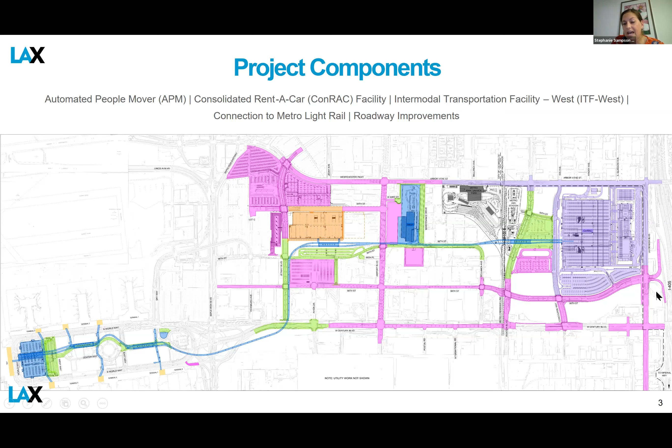So this is just a simplified map, and I mentioned we're going to walk you through all of the different components. We're going to start on the far west side, but you can just see from the previous elements map to this one, we're going to walk through right now.

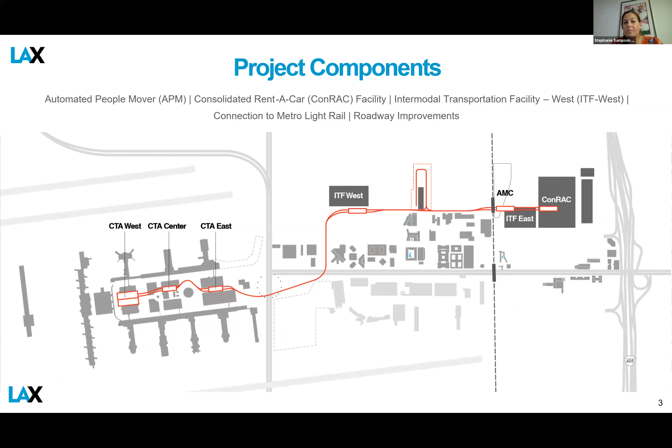So the automated people mover system, LAX Integrated Express Solutions, is our developer. What's really unique about having them on board is the type of contract we have. It is what's called a public-private partnership, where they are designing, building, financing, operating, and maintaining for a 30-year period. Their contract for that 30-year period is $4.9 billion.

It's a brand new system operating at a high level, state-of-the-art technology, and everything along with that. This was the largest contract ever awarded in our city's history. So you can see the investment that we're making to make this airport a world-class airport that everyone will want to come to, not avoid, in the future.

So end to end, that entire guideway is 2.25 miles. It's elevated, so it's 50 to 75 feet in the air, depending where you are along the route. There are 6 stations total, with 3 inside and 3 outside. End to end, it's 10 minutes.

I'm sure like most of you, during heavy travel times, trying to get to LAX could take about 45 minutes or longer to get in and out of our horseshoe. With this, you will know exactly how long it will take you to get in and out, 10 minutes or less. So we're really excited about that, and about the frequency of the trains.

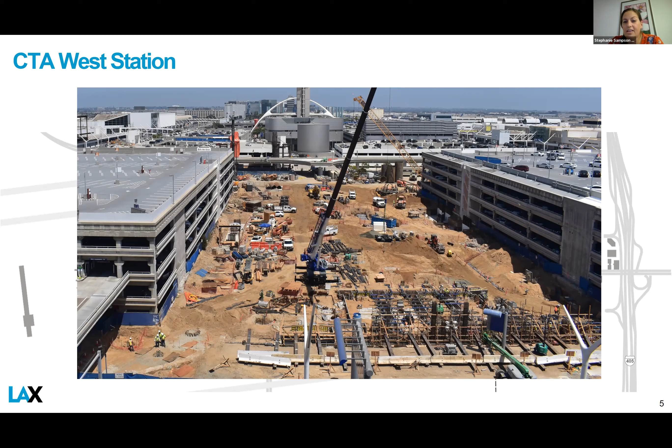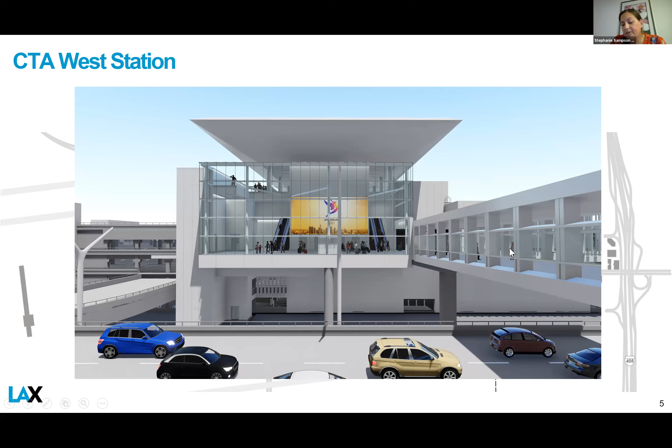You can see the architectural elements here. It's a mid-century modern aesthetic, which is our design guideline at the airport. So we have open air stations, very thin roof lines, and also to the right over here, though you can't really see it, we'll have an exhibition space where we could potentially hold events.

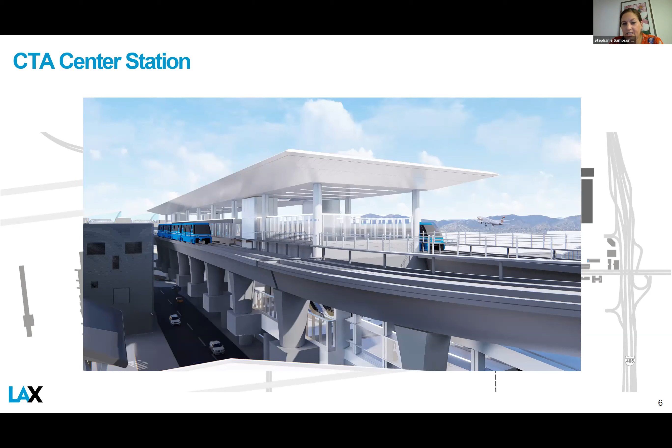This is what it will look like once completed in 2023. You can see how the guideway splits as it comes into the station, allowing for a lot of pedestrian movement into and out of the trains.

Moving easterly to...

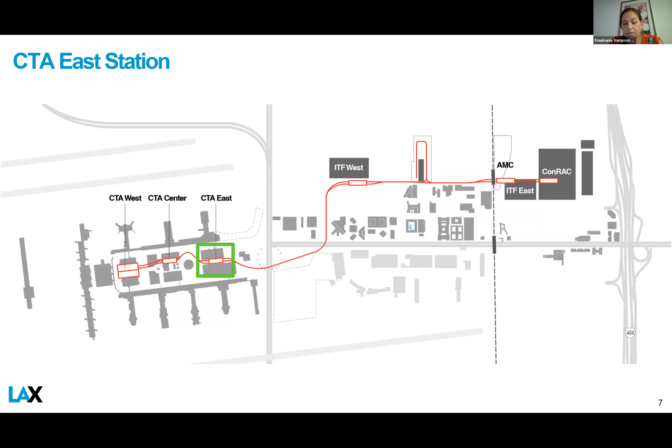Sorry, it looks like we're having a little technical difficulties. So just bear with us real quick.

Okay, so this is the current view from the roof of parking structure 7. This is one of our further along areas of construction. You have, well above our 3-level parking structure, the false work and the columns prepping to pour some of the guideway in the near future.

So our Intermodal Transportation Facility West, again our term for our parking structure, which will be renamed, is actually opening up next year. So it's very exciting because it will be our first completed project.

The reason we're opening this early, ahead of the People Mover by a few years, was to offset any impacts getting into the terminal area from construction and provide new pickup and drop off areas outside of the terminal area. This one opens next year with almost 4,300 parking spaces with short and long term valet parking.

And it's also going to be home to our security and badging office. We have over 55,000 people that work at the airport with a badge, and they currently have to drive vehicles onto different roadways to get to their badging appointments.

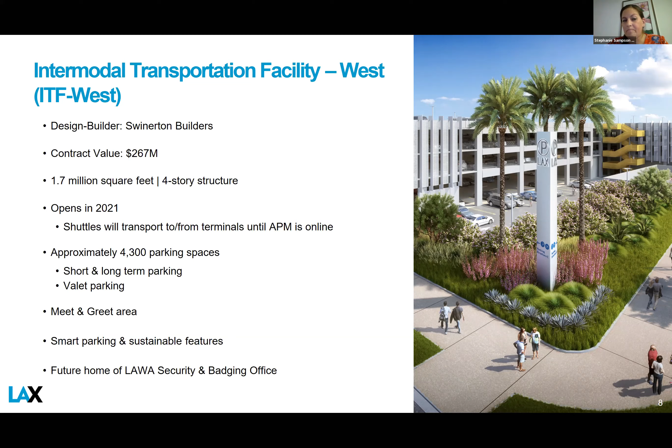So now we can utilize public transportation and our People Mover train and get a lot of vehicles off of the roadway. We'll have a shuttle bus system transporting people when this opens in 2021 to and from the terminal area. And then in 2023, the shuttle goes away and the train is what you connect with.

So again, here we are on the map. And then this is the current view from one of our construction cameras. Gives you a really good view of the progress. They're already on the 4th and final level of this structure and looking at pouring the final bit of concrete in November, so we're full steam ahead on this project.

This gives you a really good view of the guideway itself. 96th Street is right at the bottom here, so the false work has gone across 96th Street. We just posted a video yesterday of a time lapse of the construction of false work over 98th Street, which is just south of this area.

So if you have an opportunity to go onto social media for the airport, check it out because it's a really good view of how they put the false work up.

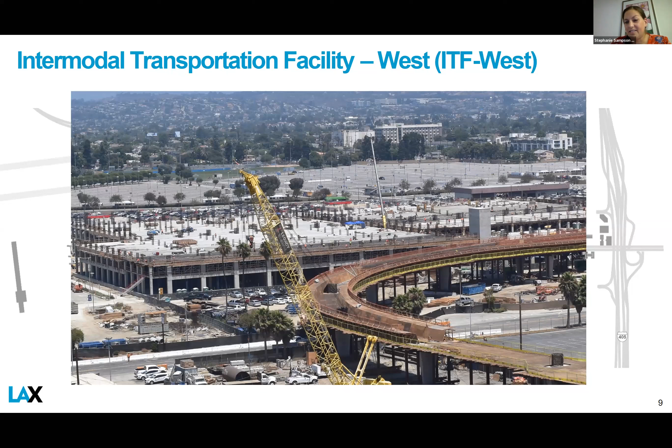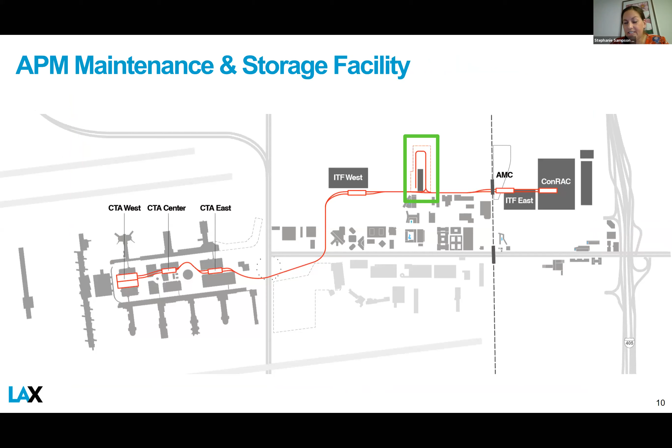So our maintenance and storage facility, again automated train system, everything is controlled from this facility. Right now, very exciting, they've started to put the roof on. We got excited when we saw this yesterday because they're moving very fast.

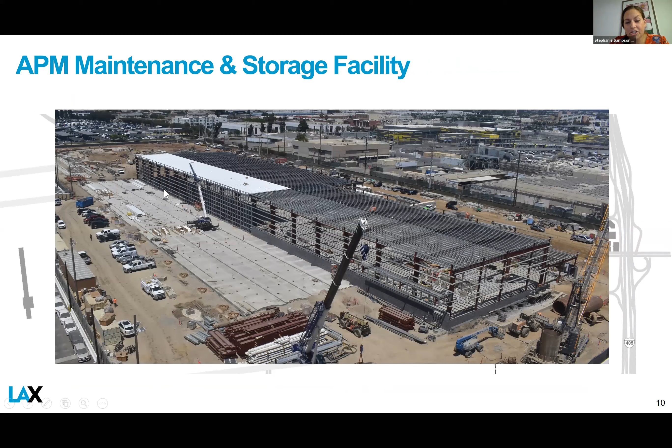And you can see over here, these are storage and test tracks for the train. And this view is the rendering.

Basically flip that previous photo, but this is the only area where the train comes down to grade level. So you have it up above here on 96th Street.

It will come down, go through a train wash which uses reclaimed water, so very sustainable, goes through inspections, and then comes around the backside for either storage or testing.

All of these blue panels are solar roofing. So again, looking for a very sustainable building, using power from these to help power the system. And within this, it's staffed 24/7. Everything is controlled from that area.

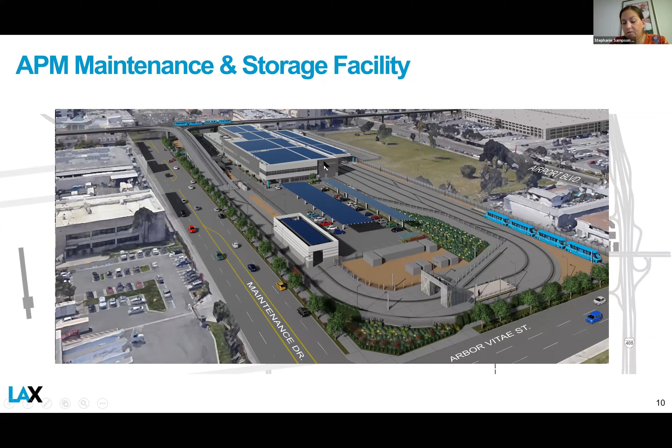Connection to Metro Light Rail. So again, first time we'll be having connection with the Metro system, so we're very excited.

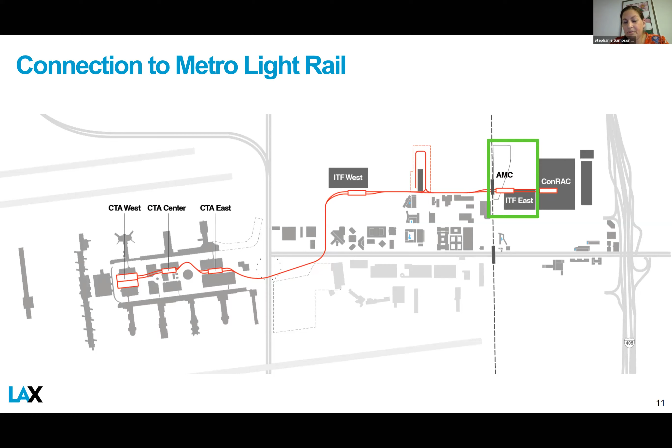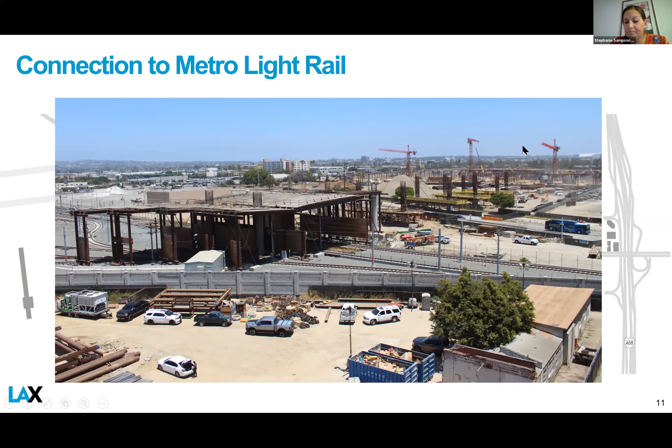So once it is completed, this is what the ITF East, Intermodal Transportation Facility East, which in this case is just a surface parking lot, will look like once completed. You have the Metro station over here, and it interfaces with the People Mover, and you would catch the People Mover here.

So you come in at grade level on Metro and go up and over to the People Mover. This surface parking lot, along with the ITF West, are two locations where we potentially will move commercial transportation like Uber, Lyft, maybe hotel shuttles, parking shuttles. We have the commercial capabilities and we're studying that right now, and we'll make a decision closer to opening.

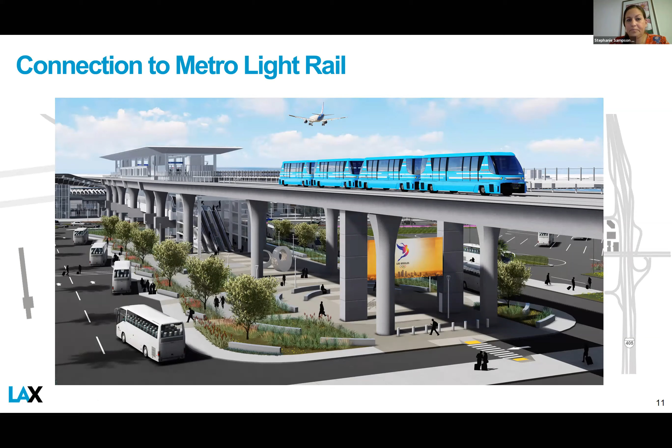Our consolidated rental car facility - just like the People Mover contract, this is a public-private partnership as well. LAX ConRAC Partners is our developer. Theirs is a $2 billion contract, and this will build the largest rental car facility in the world once completed, capable of holding 18,000 rental cars and moving a car out during peak operations every 2 seconds.

So obviously right now, the rental car industry is not what it has been in years past, but we know that this building is something that, when travel returns to more normal levels, will be highly utilized.

We also are future-proofing it. So in the instance that we see a significant drop in market share for rental cars, we can claw back space and create commercial development area. We are also putting in electrical vehicle infrastructure, so when rental car fleets become more EV friendly, we have the capabilities of going back in without tearing out walls and concrete and everything to go put in charging stations.

But this will remove all of the rental car shuttles from the roadways into and out of LAX. All the rental car operations will be handled here. So we have 7 companies representing 14 brands that will go into this facility. If you're a smaller company and don't want to go in here, you will have to be picked up and dropped off curbside at the facility itself.

So it really takes away from a lot of the traffic. That's 3,200 daily shuttle trips, over 1 million a year, that will be taken off the roadways and freeing up curb space in the terminal area.

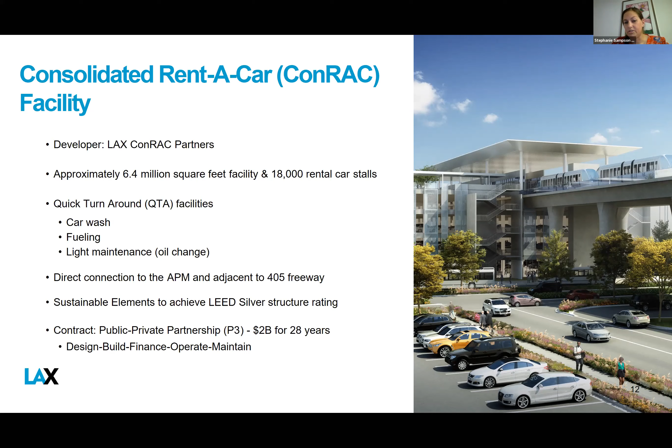So again, the far right side of the map here, this is a view, and this is just half of the facility area being built. This is the prime area where the ready return idle storage will be located. The other side, which I couldn't fit without making it very small, is the quick turnaround area, which is where cars will be serviced - oil change, car wash.

But in just a few years, this is what the rental car facility will look like. This is Concourse Way, which is another roadway that will be extended, and you can see the train as it pulls in on the top level here, and then you'd go find your rental car company there.

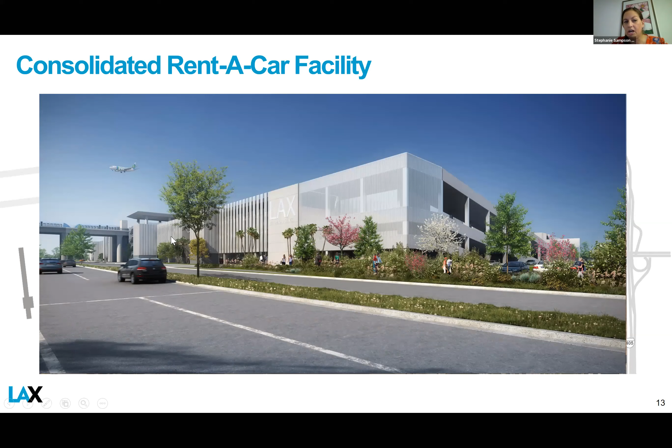And then I keep mentioning the photos are from our construction cameras. Laura and I were very excited when all of our cameras got put up because I always go to it every day to find out where we are with construction and to have fun with the videos and create time lapse and everything like that. So you can go, and I'll put it in the chat, the link to it - you can go to our website and check out the live feeds, watch time lapse, see what it looked like 2 months ago, check out our photo galleries and read about all of the projects. On this page as well, there's the fact sheets page where you can look at QR codes that provide virtual looks at all of the stations, so it's a really cool 360-degree view of what it will look like once completed.

And that is the future of LAX. I'm going to stop sharing my screen and open it up for questions.

So one question that we had that we didn't get to answer quite yet was how has the pandemic changed working conditions, and what difficulties have you guys had to overcome with construction and everything?

Obviously construction has been one of the essential operations during COVID, and we're very grateful for that because we all have jobs because of it. But what we've been able to do is first follow the building and safety standards for safety protocols. A lot of our sites are doing temperature checks, you have to have PPE, maintain distance, and make sure they're doing contact tracing if there's any testing positive.

But these are heavy concrete structures, and heavy concrete structures in California, elevated, always poses a bit of an engineering challenge. It's kind of hard to tell in terms of scale, but these structures actually go over, like this one's good, CTA East. This goes over and beyond the parking structures that are there, and we're talking 80 feet in the air.

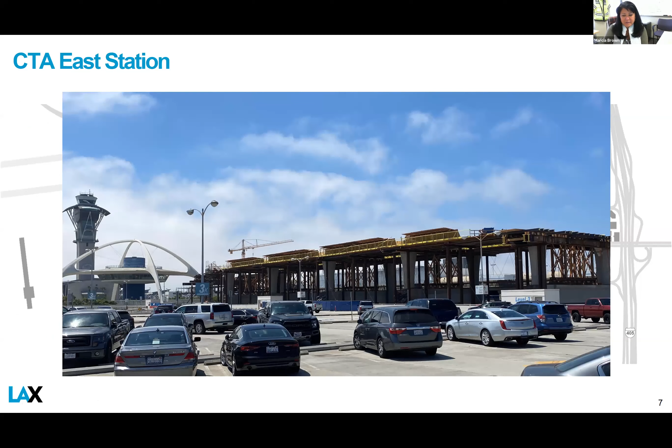So dealing with seismic considerations, and there's a good picture of it in construction right now. This parking structure where the cars are, that's 4 levels, and then we're probably another good 2 levels on top of that in terms of just height. So seismic is always a concern.

We had to go through a seismic peer review panel as we permit these structures, so just scrutiny of how the seismic loads are transferred in, where the faults are. We had to pull in 7 different response spectra for this, and just make sure that we've enveloped the forces that are coming in.

So not only dealing with seismic, but then also with operations. As you can see, these trains, the tolerance of any kind of horizontal and vertical movement is extremely restricted as well. So not only do you have to deal with high seismic, but you have to deal with restrictions from the train operations. So we have bearings.

As you drive through some of the underpasses, most everywhere, you'll see a lot of these disc bearings. What it does is it allows the concrete, for thermal expansion, for seismic, for anything, to move so it's not locked in. Those are also restricted to the differential, so the trains don't derail, that type of thing.

So these bearings are coming in. They're huge. I had the opportunity to go out to New York to watch the testing of these bearings, and it was impressive. I mean, we're talking 1,000 kips in one direction. They hold uplift forces of 900 kips. So it's nothing to scoff at.

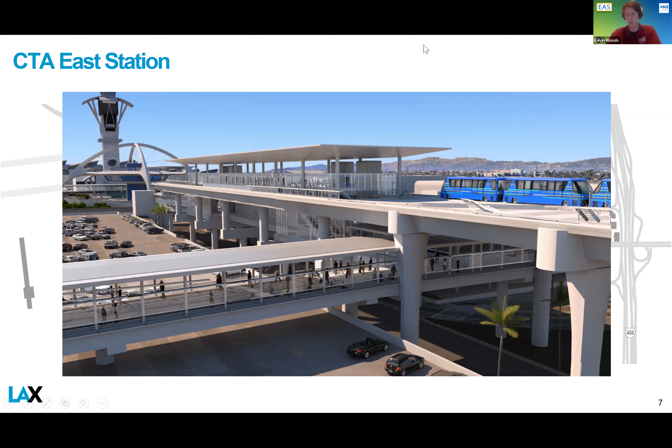That's very, very cool. I don't know if you got to work on it or not, but I was kind of curious as well on the automated people mover, as far as the technology for the automation of it. I know lots of other airports have done this, but I was curious how it compares and if there were any complications with that technology.

No complications that I know of. We are using a company called Bombardier, and they've done these trains throughout the world, so it's well established. But it is interesting though, because construction is targeted to finish in 2022, and it takes a whole year and more of just testing and commissioning of these systems.

So even though construction, we'll probably have some roadway type stuff linger on, but for the most part the stations and the guideway will be done, and it'll allow the testing to start. But there's a lot of different hoops to jump through in order to get that all signed off and safe for the public.